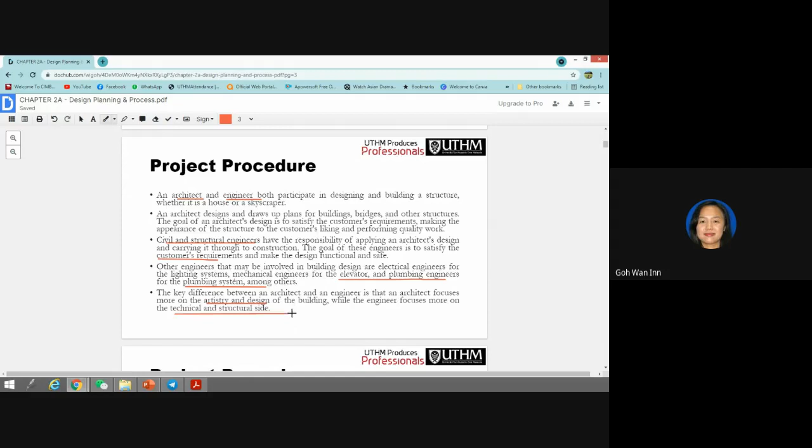So while the architect is concerned to make the building aesthetically pleasing, the engineer makes sure the building is functional and safe. So we are playing different responsibilities lah. And normally, in the site meeting, both parties will fight with each other lah.

Okay. So to develop and present their designs, both architect and engineer use technical drawings called blueprints. A blueprint is the detailed drawing presented by an architect or engineers that outlines their design.

I turn on the aircon mode.

Okay. So in designing any structure, an architect has to plan out his or her ideas by making a scaled drawing. Means the drawing is being scaled lah. I believe you already learned AutoCAD, and some of you are from the X diploma, so you know what the scaled drawing is lah. So before an engineer can approve an architect's designs, they have to analyze the design and select materials that can safely hold up the structure.

Okay, so for this subject, we are going to design the beam, RC beam, up to beam. So for column and others, you need to learn it in the next subject, which is the structural design, the reinforced concrete design. And we are going to learn also timber and steel design for the beam and column. So this is the scope for this subject, up to this point only.

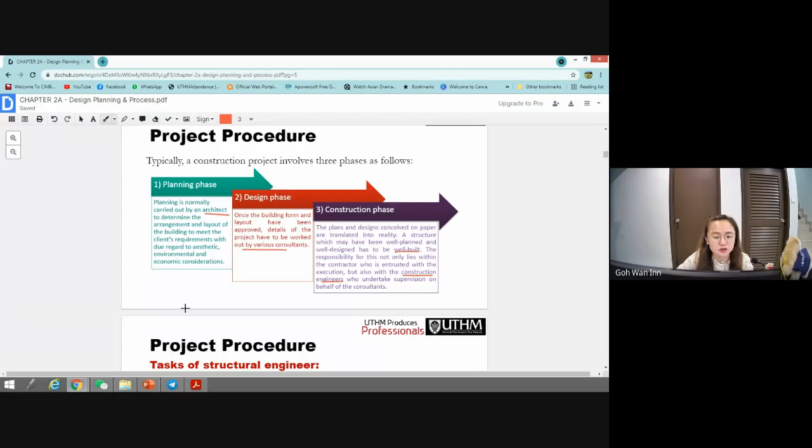So a structure which may be well planned and well designed has to be well built, and the responsibility for this not only lies with the contractor, who is entrusted with the execution, but also with the construction engineers who undertake the supervision. So who wants to be a construction engineer? You need to undertake the supervision on behalf of the consultant. Okay, so on a construction site, normally the consultant will also send their engineers to observe and inspect the quality of the work, to make sure the building is constructed according to the standard, with safety, everything lah.

So, tasks of a structural engineer. For a structural engineer, we have 5 tasks here. So first, select the most appropriate structural system and idealize the building into frames and elements. Okay, so you need to select the properties, select the materials, select the structural system, okay, and idealize it.

And then second, we need to estimate the loading. So of course, we need to calculate the loading for the design building before we start designing the beam and so on. So by next week, chapter 3, we are going to enter this estimation of loadings. And then analysis is to determine the maximum.

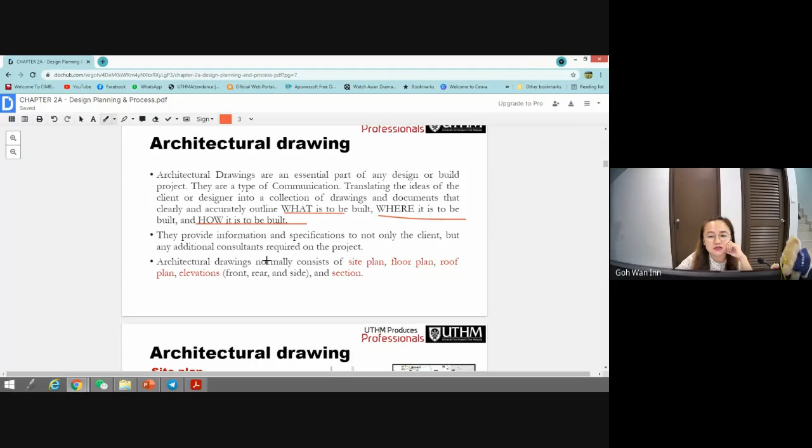So normally the architecture drawings consist of site plan, floor plan, roof plan, elevations and sections. Section is the plan that we cut through, like X or Y directions. Elevation is the front, rear, and side, and section is the cross section. So we will go through the examples one by one. First, what is the site plan? If you have already been through diploma, then you know what this is, especially if you did LI in the internship.

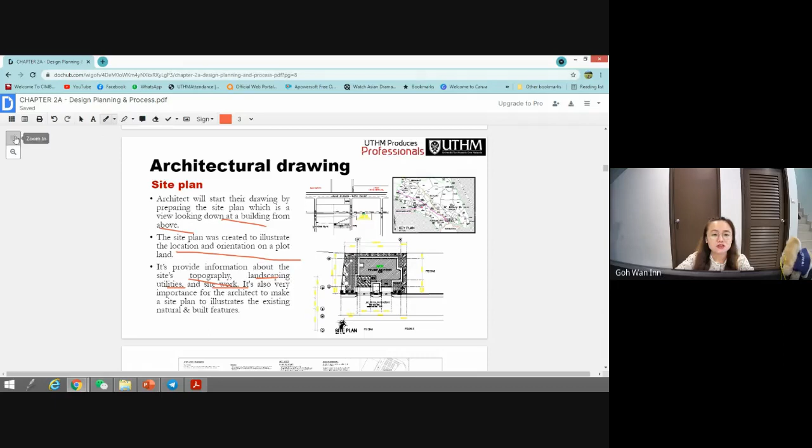utilities, site work, and it is also very important for the architect to make a site plan to illustrate the existing natural and built features. So site plan is clearly for us to see. Okay. So you can see this is a site plan. First, you can see the key plans. So this is an example key plan. So you can see where the proposed site is.

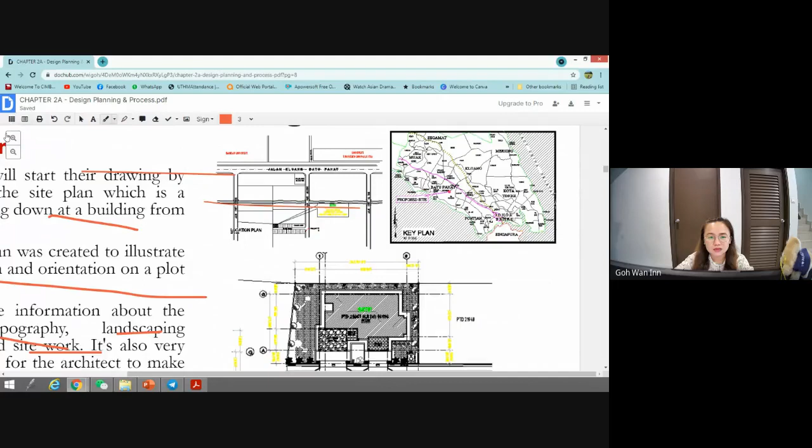So it will tell you this is a building that is here in Batu Pahat. Okay. So location plan. So this is at Jalan Kluang Batu Pahat. Let me zoom more. Okay, so it will illustrate where it is located. So, it's too big. So the location plan will show you it is here. Okay, after that it will zoom in more. So this is the view from the top of the building. So this is the site. So it will show you the nature, the topography.

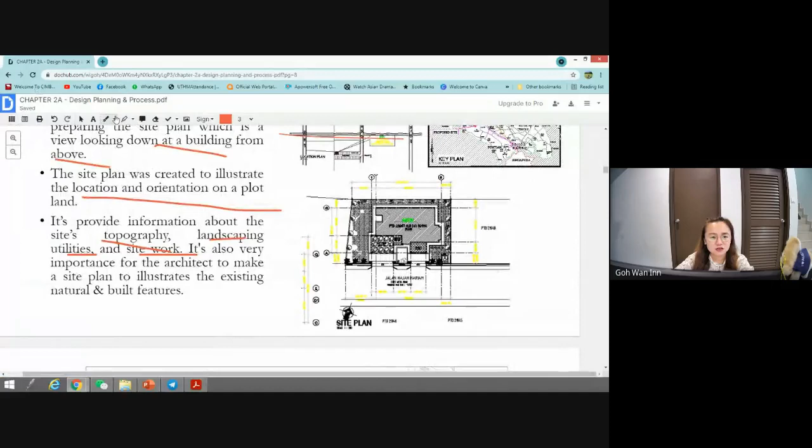So this is the site plans. Let me zoom it out back. I'm not using PDF to view it now because PDF cannot have this function for drawing and many things. So basically this is a drawing for a site plan. So you already learned AutoCAD before, I believe you know this. So again, you can see the location plan, the key plan, the locality plan. Let me zoom in more. You have the PDF slide also, you can zoom in more if you want to study it more.

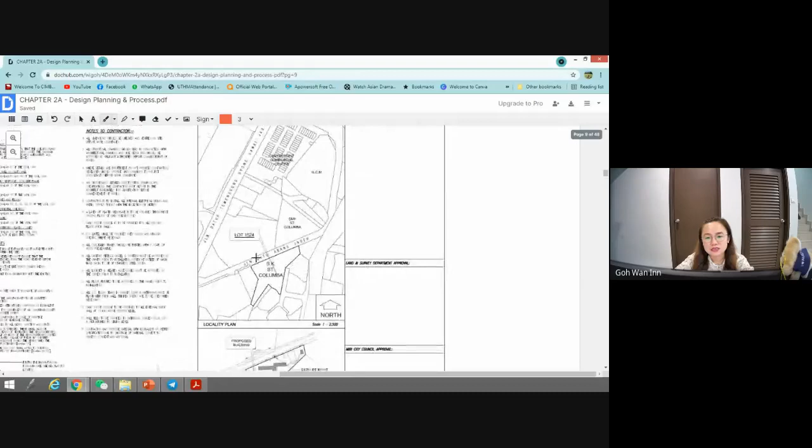So from the site plan, you can see legends, the bomba, and then it will give you the explanation. What is this building for? The base, where is the client, and so on. The key plans, where is the proposed building from the top view. The locality view, where is it? And then it will give you the view of its surrounding and where is the proposed building.

So this is the proposed building from the top, and then the existing building, the existing classroom block, the toilet, all the existing ones are mentioned. So this is the new proposed building. Okay, so this is the example site plan lah. And then next we go to the next slide. No questions, right? It's easy, right? Just introducing to you what is the plan. Not yet, when you face the architecture plan, then you will have questions.

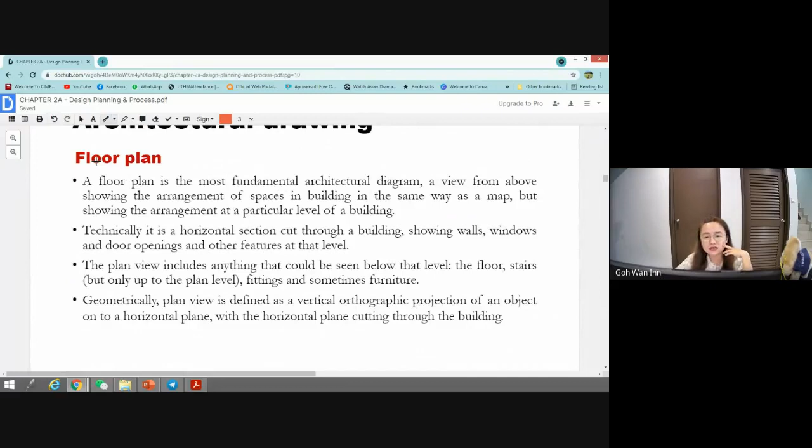So a floor plan is the most fundamental architecture diagram, a view from above showing the arrangement of spaces in the building, the same way as a map, but showing the arrangement at a particular level of a building. So floor plan is according to the floor. So let's say you have a single story building, then you will have ground floor and roof floor. But if you have a double story building, then you will have ground floor plan, first floor plan, and roof floor plan.

So technically it's a horizontal section cut through a building. So the building is cut through horizontally according to floor. You cut in between roof and the ground, so it becomes ground floor. Let's say single building, and then you cut at roof, then it becomes a roof floor. So it is actually a horizontal section showing the walls, windows, doors open, and other features. Architecture plans show you where the doors, the windows, the walls are. But structural plans, no. So we need to convert all this into a structural plan.

So the plan view includes anything that could be seen below that level, the floor, the stairs, but only up to the plan level for the stairs, fittings, and sometimes furniture. So let's say you get the brochure from people selling houses, especially like the single story house, the double story house.

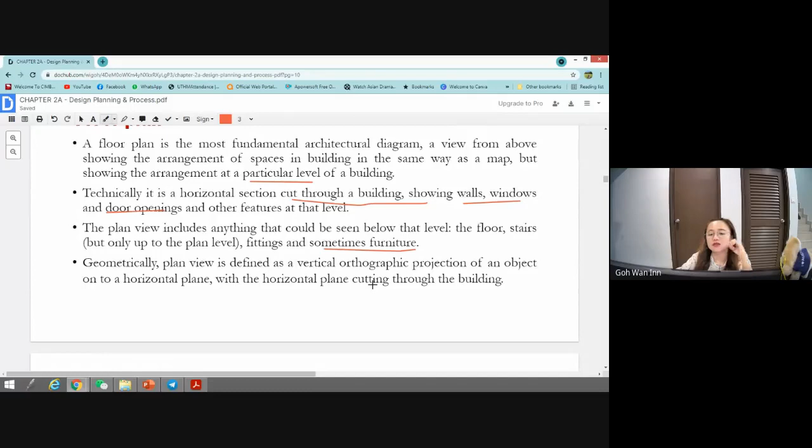So this is an example of a 3-story kindergarten building, I think. You can see this example building, let me zoom in more.

So this is not a structural drawing yet, okay, it will mention and explain to you. You see this is the door opening.

So this is what area? Dining area. So this is the meeting room area, the corridor, the staircase, the stair, the office, the nursery - 1, 2, 3, 4.

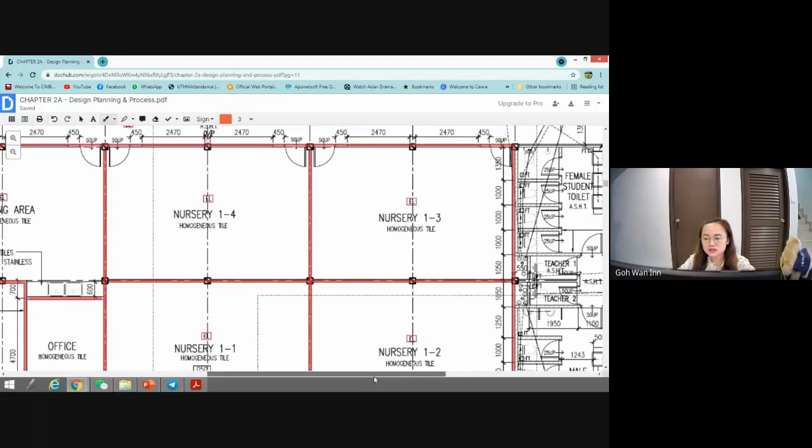And then they have toilets. Toilets also they will have a drop, they will explain how much the drop is. The drawing is very detailed and I cannot see clearly, but you can see these buildings, the toilets here.

Normally toilets will have a drop. So where is the up, where is the drop, they will show you. Drop means it is lower than the normal slab. Because when you go to the toilet, normally it will become lower, you will drop the slab - that's what we mean by drop. So when you design, you also need to drop the slab, else the water will go to other places. If you don't believe me, go to the toilet later, not now.

So this is the corridor and so on, but you can see all the doors. They will include all the details, mentioning utility rooms, where is this, where is that, for all the information. And then they will show you this.

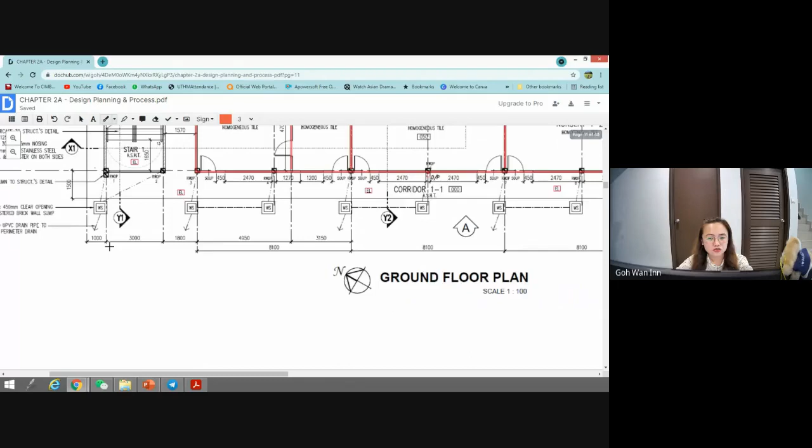They will show you Y1 and Y2 - this is where they will prepare the section, the cut, for you to see later. They will have X1, Y1, and the direction, you see this arrow direction. That means the view provided by X1 is cut from here to there, going to here. From Y1 means from here to here - yeah, my mouse is not nice at drawing this, I need to use the tablet but I'm lazy to take it out. So it's from here to here, Y2 also same.

So you need to see the drawings, not only one, but refer to each drawing. So when you have the plan, you will also have the elevation plan - A, B, B is from here, C and D. So we will go to more.

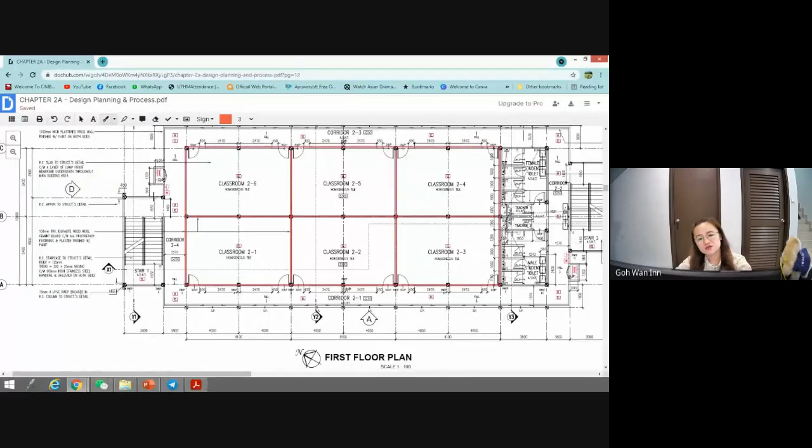So this is the first floor plan, that one was the ground floor, so now it's the first floor. You can compare what things they have or don't have. So the ground floor, they will not have the corridor like just now, right?

The corridor, they don't have any wall, but here you see they have the wall design and so on - this is a wall that they have to build. They have the corridor built, it becomes like a cantilever structure. So you can see here don't have any column - no column, right? Corridor, you can see here is nothing, nothing here.

But then you can see where it comes here, you can see here you have the columns, so you have the point. No columns here, you have the wall. So this is the first floor.

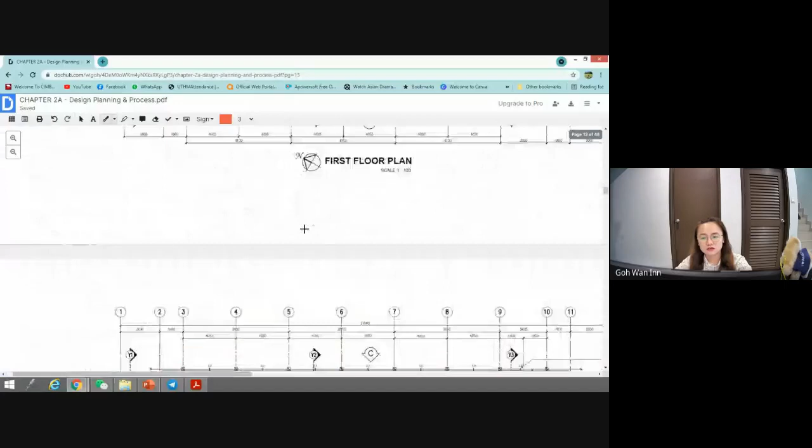Also the second floor is similar, but it will show you the purpose for this room - showing the purpose of the room is also important, so you can calculate the loading. Different areas might have different loadings - like for the corridor, you don't need to use the primary beam, you can use secondary beam instead, because the loading is small, it's just human traffic. The staircase, the toilets, where is the location for all this.

This is the architecture drawing, so the roof floor. The roof floor will show you where is the floor - meaning the RC flat roof with Sika waterproofing details. This is the roof, they will show you what requirements they want.

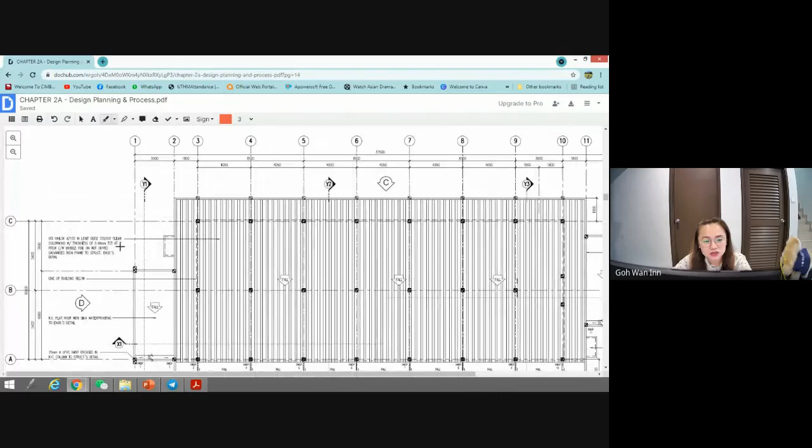Okay, it will show you the detail of this. RC flat roof, the waterproofing, spoon drain and so on. So this is the roof. They will give you the details, the frame, the iron frame, and so on, and the directions. So that one is architecture plans.

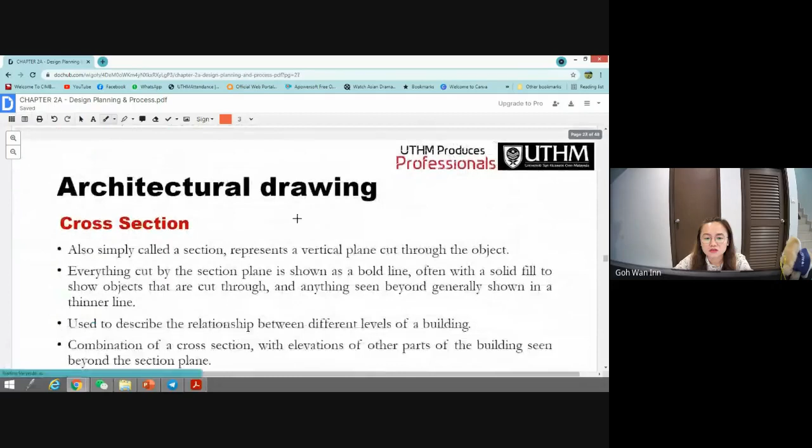So this becomes the ground floor plan. Wait, let me show you the elevation that they have. No, this is another building. Okay, this I think is the same building.

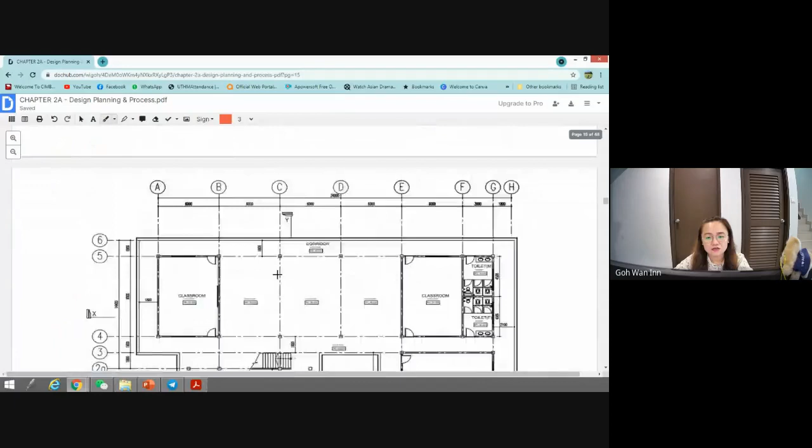Alright, I go to the ground floor drawing first. Wait, let me go to that. Okay, so if you have this PDF, if you already printed it out, you can see the plans. But this is another building. This is actually from a book sold last time by Mr. Sophie, Practical Design Reinforced Concrete Building, if you can see my webcam.

So this is another building. Just now was the nursery building, but this is a 2-story school building design. So it's a book from UTM by Muhammad Saleh Yassin, a very famous lecturer from UTM. So this is another set of buildings, another drawings, another set of architecture drawing.

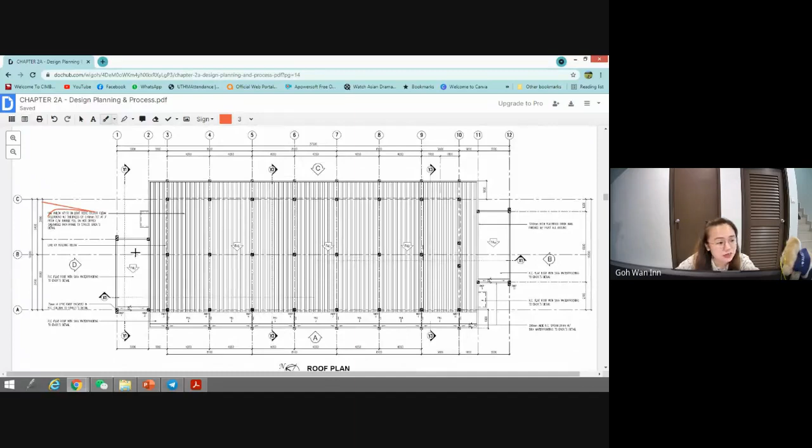Just now the first example was for a nursery, the kindergarten. So now we have another set of architecture drawing, not the same, different drawings, different set. So you can see now another drawing of a school building. I'll zoom in and out more to let you see the overall picture. Okay, so this is a ground floor plan for that drawing.

So you will have a simple building like this on the ground floor - classroom 1, 2, 3, 4, all these are classrooms, and the toilet. This is the toilet area. Imagine when you are in the school, the toilet is always at the end of the building. And then this is the library. So all these are corridors for walking, and this is the staircase to go to the second floor.

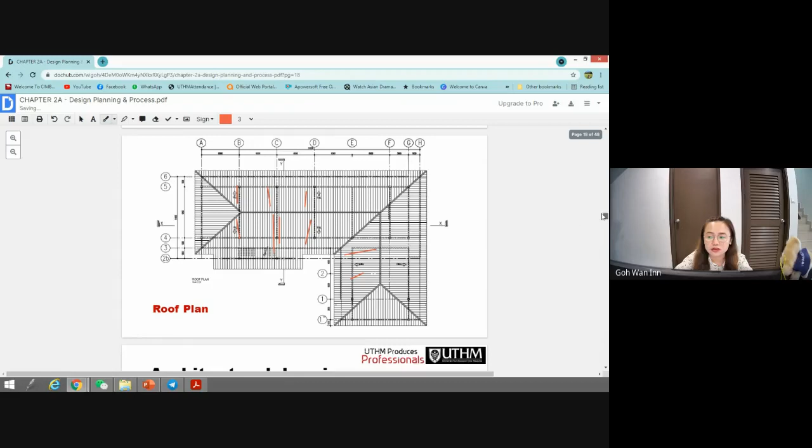So they will show you also where the column direction is basically, for the main columns like the architecture design. But if you need any additional columns, you can add them also. The beams here are not necessarily just what's put in - basically the beam will normally follow the locations, following the shape of the building, but you need to add the beam that is needed, and then it's like a flange beam in a slab, the flange beam.

Okay, join with the slab, become the T flange beam or the L at the corner. So after you get all this plan, that one is finished, that plan, the floor plan. So we go to elevations.

That just now is 2 examples of the ground floor plans. Don't be dizzy with it. So elevation is a view of building seen from one side, from the side view. Just now is the floor view. Okay, from top you cut section horizontally.

So this is elevation from the side. It's a view from a building seen from one side, a flat representation of one facade. The most common views used to describe the external appearance - how does it really want to look like after the completion?

So each elevation is labeled in relation to the compass direction it faced. Just now I mentioned the view from A, B, C, D according to that drawing, right? So you have compass directions. From left, the view is from here. From right, from left view to the right and right to the left. So you need to put the compass directions.

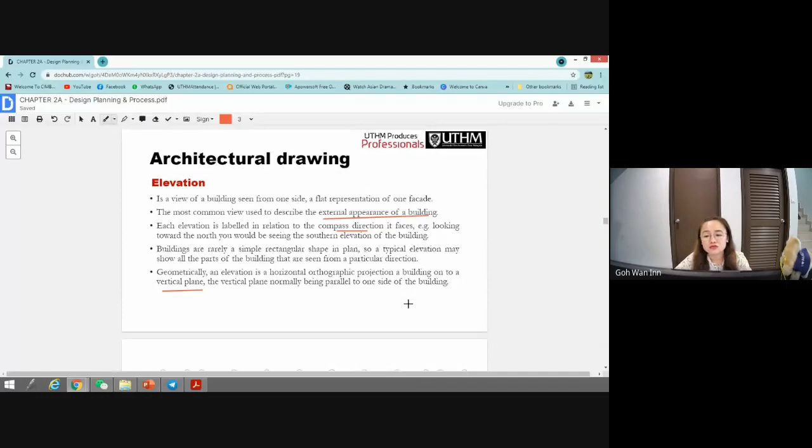Looking towards the north you would be seeing the southern elevation of the building. So buildings are rarely a simple rectangular shape in plan. A typical elevation may show all the parts of the building that are seen from a particular direction. Geometrically, an elevation is a horizontal orthographic projection of a building on a vertical plane, the vertical plane normally being parallel to one side of the building.

So examples - this is the elevation for the school building from the front. From the front here you can see ground floor, first floor, second floor, and the top, the roof floor. So actually this is the plan for this building. You can see this is the first view, the building here.

So the view, it should be here, but then it is not 3D. So the building is basically L shape. You can see it is L shape, right? The L gun. But then if you view from here, if you view from here, if I slot in this one, if you view from here,

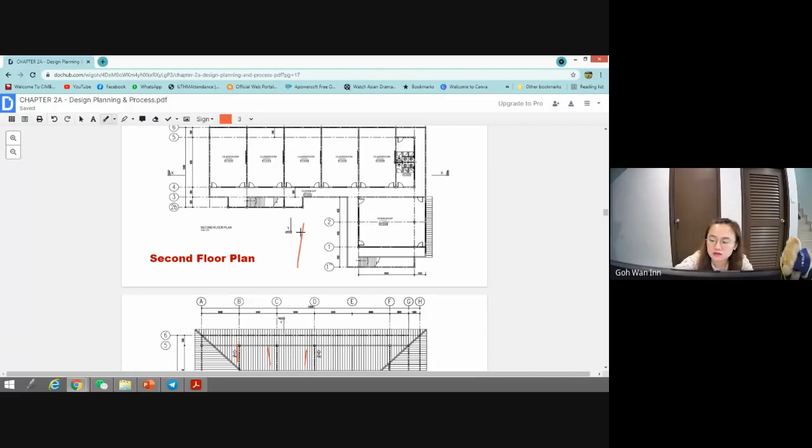Oh, the internet is, wait up.

If you view from here, from here, this and this is going to, it will not show this part. This part is not being shown. It will show the view from here to here, from here to here, this part. That's why when you see the building, you can see this part, the school building, and then until here. Here is actually that part.

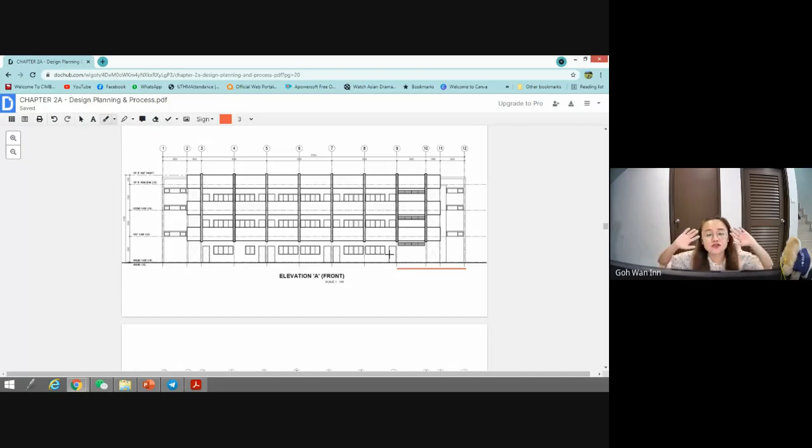Okay, but it's being overlapped because it's not 3D. It's view from the front view, and then you have the back view. Now, from the rear view, you will see from the rear, which is this side. Let me go back to this. If mentioned the rear view means it's from this side. So you will see, you will not seeing this part, but you will see all this part.

You will see all from here to here. So this is the rear view. And this is the front view. Go back, if you are not familiar with the architecture drawing, after this class, you can go through the slide again, you imagine and you compare, because you yourself, you have to do the project, okay? So this is the rear view. From rear view, what does it look like?

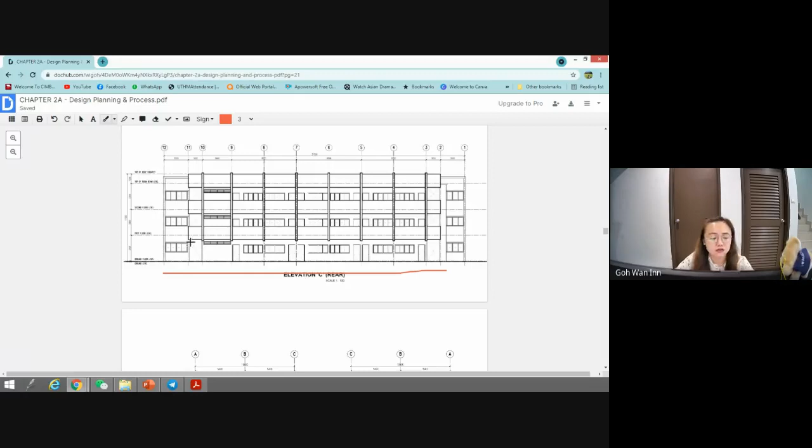You can see that this is the corridor, and then the school building. I believe everyone got in the school before, so you are very easy to imagine the school building. Ground floor and then upper floor, first floor, second floor, and roof floor. You can see each building, how does it look like when it is complete. You need to have the imagination of how it looks like, because if you work in the contractor, become the engineers, site engineers, then you need to construct to make the building look like this after it's complete.

And then view from the right side and from the rear side. This is from the right side, which is from this side. And this is from the left side. How does it look like? So you can go through it again.

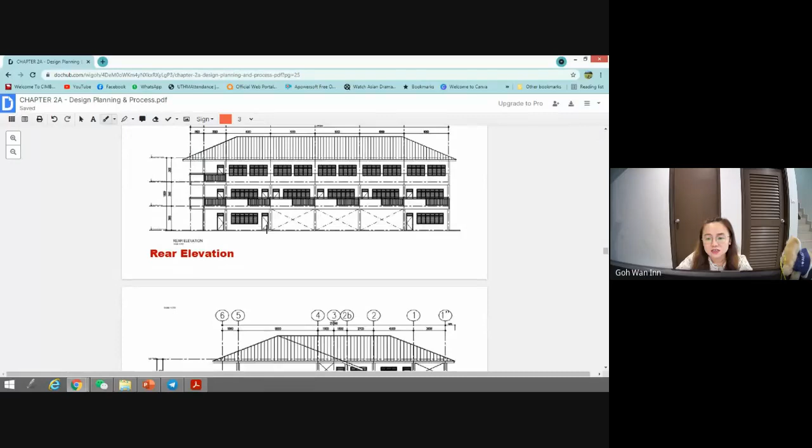And then the front elevation is not my parcel, some other my neighbor's parcel. The front elevations - this is the left elevations, and then this is the rear elevations. I think this is for another building. This is the right elevations. You can go through it.

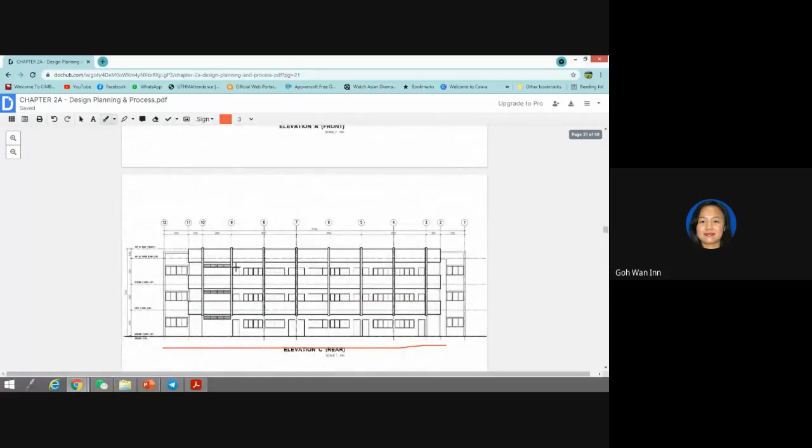So if you have this book, it will show you the elevations. Oh, this is for the... sorry, just now this one is for the kindergarten building, the 3-story. And this is for the school building. Okay, for the school building.

My cam is error again.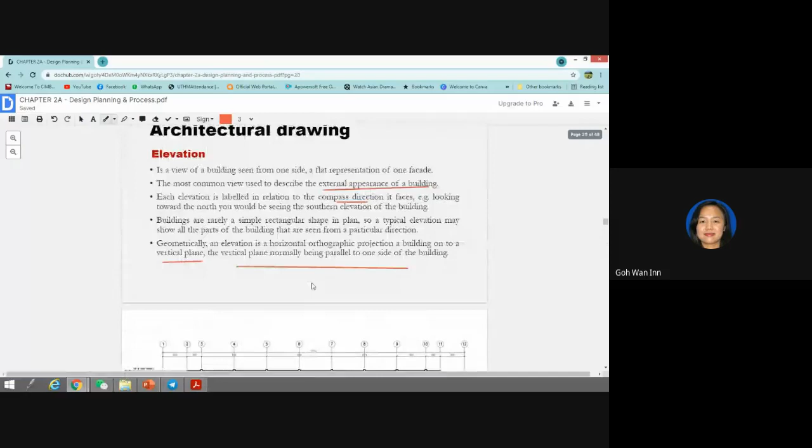Switch it off. Okay, so this is for the school building. The front view, left elevation, rear elevation, and right elevation. Okay, so just now this one, the A, B, C, D view supposedly is for, I need to scroll to the top. These two buildings look similar. Wait, this is the A, B, C, D view.

Okay, my internet is not working okay today. It's delayed again. Wait, my computer is protesting now. It's hanging. Hiya, wait, why is it hanging? Never mind. I opened it. Wait, my computer is hanging. The screen is not moving. Let me open this one, but this one I cannot touch it.

Okay, so just now you have 2 sets of it. You can go through it. Okay, the right view. Okay, the cross sections. Just now we already explained the elevation plan, so now we go to the cross section plan.

Cross section plane, also simply called a section, represents a vertical plane cut through the object, and everything cut by the section plane is shown in a bold line, which are solid fills to show objects that are cut through, and anything seen beyond generally shows in a thinner line. It is used to describe the relationship between different levels of the building. A combination of cross sections with elevations of other parts of the building seen beyond the section planes. So geometrically, the section plane is a horizontal orthographic.

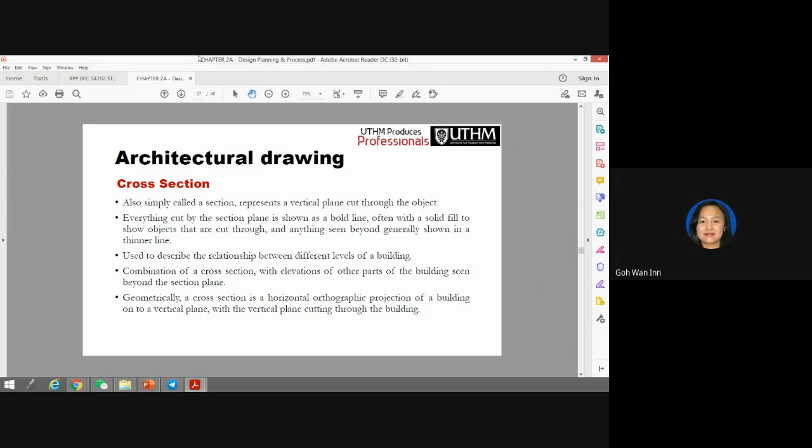Okay, so you can see that they cut through the nursery at the kindergarten. They cut it, and then you can see that this is the cross section. Just now we have the front view, the side, the elevation view from outside, exterior only. So this one will cut through the middle, so you can see that from X1. So when you cut, according to the view, what you will look at. So you can see that this is the ground floor, first floor, and ground floor, first floor, second floor.

So you will have the area of prayer rooms, computer room, library, classroom. Okay, and then this is the corridor. Toilets are here, I think. Okay. So XX, and then the YY, when you cut from that view, it will show you the staircase. So this is the design of the staircase. So you climb, and then this is the stair, and then you're going up again. So you can see all the details. You have the PDF, you can go through it again.

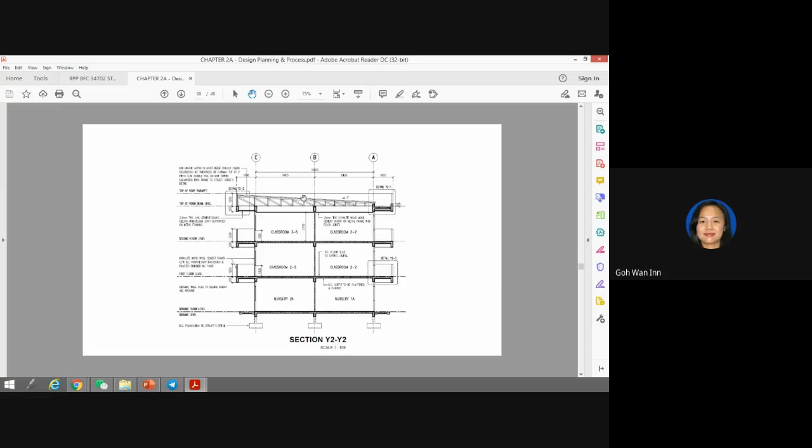Okay, so we'll cut from Y2 and Y2. So you will see the views like this. Okay, the corridor, how does it look like? Okay, the frame for the roof. Roof truss, how does it look like when you want to calculate the loading? Okay, so this is Y3. The toilet, how does it look like? You need to build exactly like what the design wants.

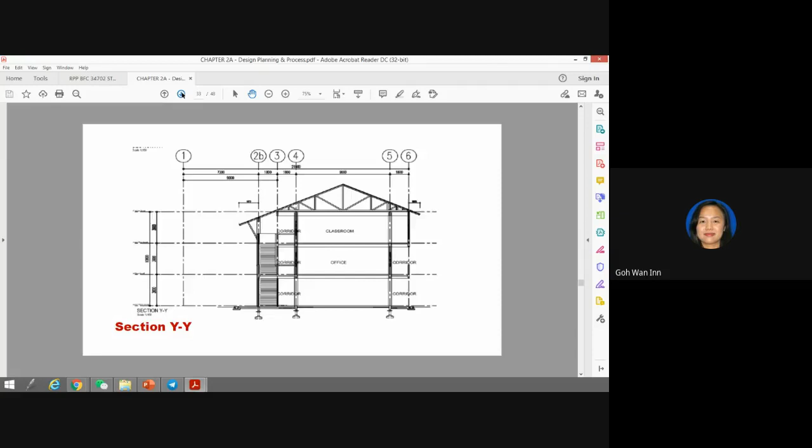So basically you have site plans, floor plans, elevation plans, and cut section plans. You have 4 types of plans for the architecture plans. And then an engineering drawing is a plan or set of plans for how a building or other structure will be built, generally prepared by structural engineers after getting the architecture plans for the building. So this involves determination of the following.

So what you have to do, we have to determine the position and orientation of columns, positioning of beams, spanning of slab. You want it to become one-way slab, two-way slab. How small, how big you want it to be. If it's too big, too wide, it will have failure, the failure at deflections. Okay, and then the layout of stairs, and then selecting the proper type of footing that's suitable.

Primarily concerned with the load carrying members of a structure and consists of structural elements, size and type of materials to be used, as well as the general demands of connections. It communicates the design of the structure to the authority for review and approval. So you need to draw out the plans and then get the authority to review and give approval.

It is also part of the contract documents which guide the contractor in detailing, fabricating, and installing the parts of the structure. So you need to provide the details, the detailing, so they can do the fabrication and installation. Following it,

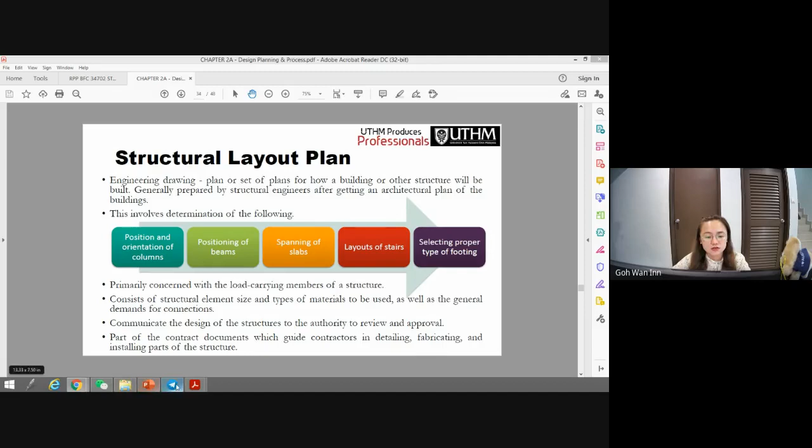I want to see that it is already not hanging. Let me check. It's still hanging.

Okay, so positioning and orientation of columns. When you design the column, the first step, before you go for the calculations, there are some building principles which help in deciding the column positions. Columns should preferably be located at or near the corners, okay, later we'll have the drawings. So normally it's at the corners of a building and at the intersection of beams and walls. Let's say you have an intersection like a T or a cross. At that location we normally put the column, because the load will be distributed to the corners of a building and to the intersections of beams and walls. So there you should put columns.

Select the positions of columns so as to reduce bending moment in beams. You need to select the position; it cannot be too far, else the bending moment will be big. Avoid larger spans of beams. The span shouldn't be too wide. If too big, you will have bending issues and deflections. Avoid larger center to center distance between columns. Both are the same: if you have a larger span, it means your columns are far from each other. So we need to avoid that.

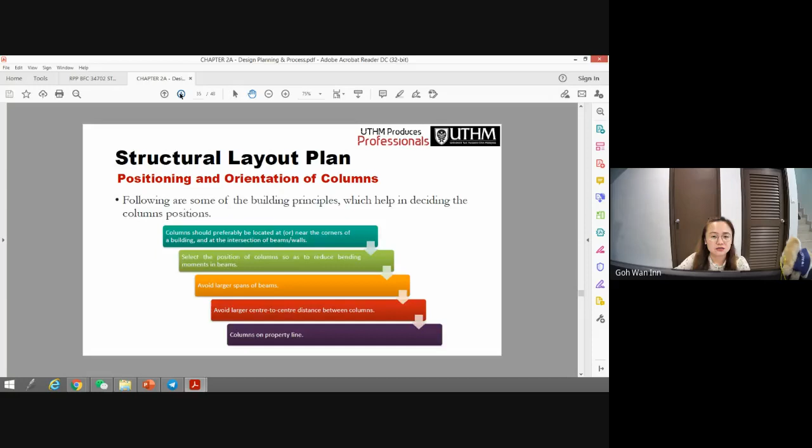Columns need to be on the property line. Don't go out from the property; it must be in line with the property, flush it in. Normally, once you become a consultant engineer, you will not do this manually. They have software, like the one you are going to learn in UTHM, for example. There are many out there, but the basics are normally the same. Position and orientation of columns.

The position of a column outside the wall in a room should be avoided, as it not only gives a bad appearance but also obstructs the use of the floor, creating problems in placing furniture flush with the wall. So columns are normally flush with the wall, meaning you cannot put the column there by itself. It will become an obstacle and obstruct the use of the floor space. For example, at a shopping mall, a big column in the middle will obstruct the walkway and not give a good appearance.

So normally it's flush. Even at your home, you will not have a column in the middle, right? It is all flush with the wall, built in together with the wall, so it's not too obvious. The width of the column is required to be kept not less than 200 millimeters to prevent the column being slender. Slender means the column is too thin and too long, the ratio. So the width is normally not less than 200 mm at least.

The spacing of the columns should be considerably reduced so that the load on the column for each floor is less and the necessity of a larger column section does not arise. If the spacing is bigger, you need a bigger column. If you reduce the spacing, you can reduce the size of the column.

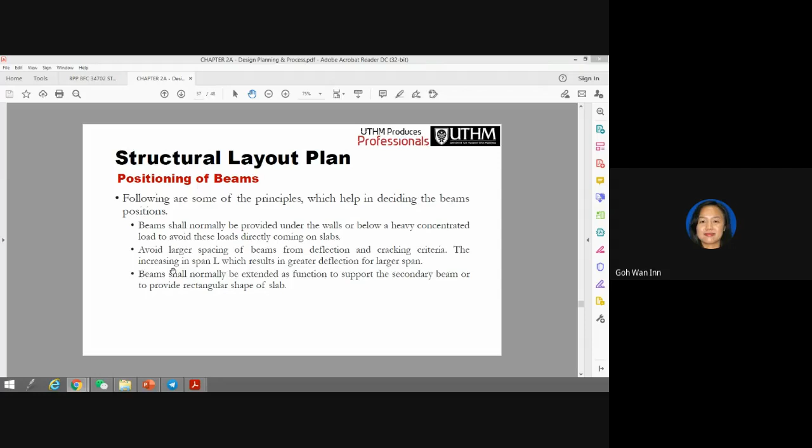Next slide. So, spanning of slab. This is deciding the supporting arrangement. In the calculation next chapter we will learn the one-way slab and two-way slab. So when the supports are only opposite each other, or only in one direction, the slab is considered as one-way supported. It means it only distributes in one way, to the left or to the right. It is not going to the four directions or to the top and bottom, not to the four edges. Okay, later we'll see the example.

In practice, when the rectangular slab is supported along four edges, meaning front, rear, left, and right, and it is a one-way slab, it means that Ly over Lx is greater than 2. Ly is the y direction and Lx the x direction length. Even though it's supported by 4 edges, it's still considered a one-way slab. The load will not distribute to 4 edges, but only 2 edges. So in a one-way slab, main steel is provided along the short span only, and the load is transferred to two opposite supports only.

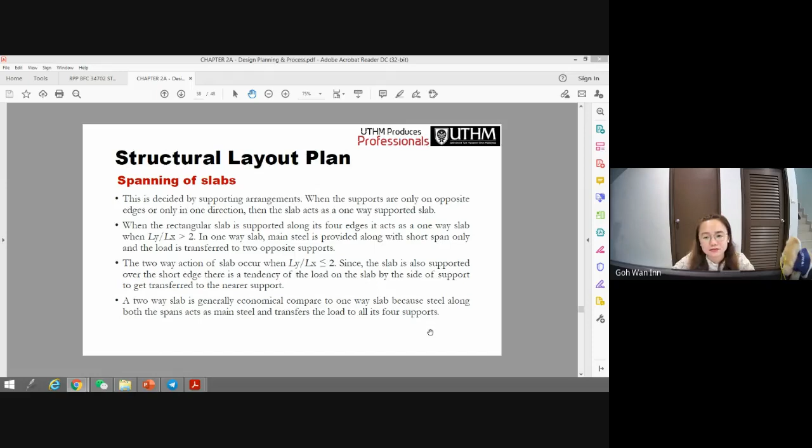Go to the next: layout of stairs. It is constructed to provide ready, easy, comfortable, and safe ascent and descent. It consists of flights of steps, usually with one or more intermediate landings, provided between the floors. So just now we saw the intermediate landing, provided in between the steps. Between the floor levels, you cannot directly climb up; it is not a comfortable design. If you keep continuously climbing up, that one is hiking, I think. Okay.

The dimension of stairs should be such as to give the maximum comfort to the users, which depends on the use of the buildings. Okay, the basic guideline of staircase layouts was clearly stated in the Uniform Building By-Laws. You can go through it, but this is not in this subject.

Normally, an architect will provide all information required in designing the staircase. Normally, the architect already decides the staircase design, so you design accordingly. It's structurally designed to consist of upper and lower supports.

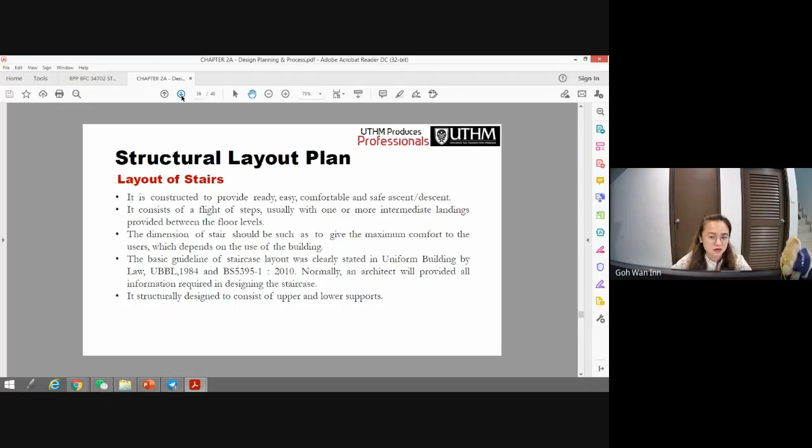So at the staircase location, do you have a slab? Is it considered as a slab? When you calculate the loading distribution, we make it as void. When we calculate the load for the span and for the slab, we will not consider it a slab. So that one will be next chapter.

Okay, footing type. The type of footing depends upon the load carried by the column and the bearing capacity of the supporting soil. For peat soil, then we need to have piles. So if the supporting soil is strong enough, then we just need a shallow foundation; we don't need a deep foundation. The soil underneath the foundation is susceptible to large variations. Even under one small building the soil may vary from soft clay to hard sand.

It is necessary to conduct the survey in the area for soil properties. You need to do the site investigation. Take the bore pile, then test and do the investigation. That one you will learn in geotechnics.

For frame structures, isolated column footings are normally preferred, except in case of hard strata at great depth, where pile foundation can be an appropriate choice. If columns are very closely spaced and the bearing capacity of the soil is low, raft foundation can be an alternative solution. For a column at the boundary line, a combined footing or a raft footing may be provided. This one you learn in foundation and geotechnics.

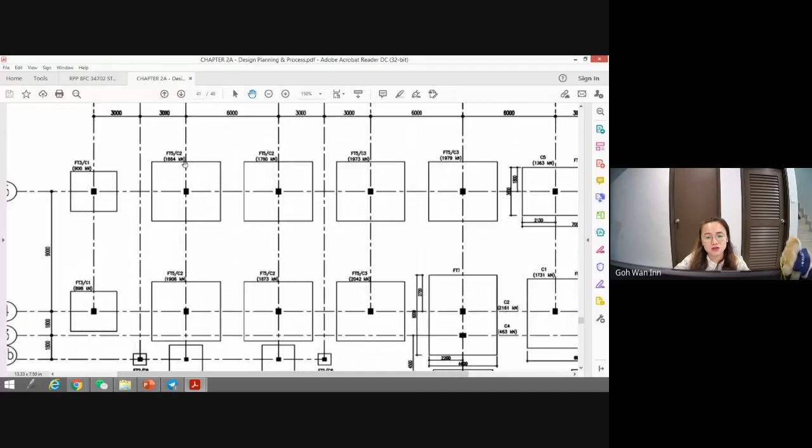Okay, so this is an example of the footing plans. This is the building, for a school building, I think. So this is the footing plan. It will show you the size of the footing, together with the loading it needs to support. You can see this one is to support 900 kilonewton. The columns will have the detailing, but here it's showing you the load for the 1884, the 1864, 17 something. This is all the loading they need to have.

And then you can see that when the columns are too near, they will combine these two columns with one footing. And these three columns combine to become one footing. So this is a group of columns combined with one footing. It is not necessary to have one column, one footing. If their locations are too near, you can combine them, so the load will distribute to the same footing.

Okay, so this is the ground floor plan. Just now you saw the fancy architectural plans that we refer to. Now you can see the ground floor plan that structural engineers are going to do. Here, one lacking thing is it didn't show the slab, whether it is one way or two way. You can see this is the floor, this is the slab, this is the column, this is the beam, toilet areas, and this is the ground floor plan.

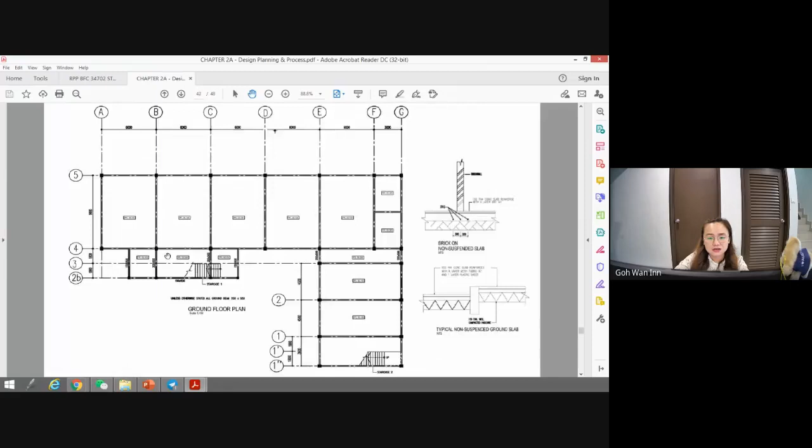But do you notice that this line is a straight, solid line? Solid line means it is not a flanged beam. These are all rectangular beams. It means the floor is designed as a non-suspended floor. Non-suspended floor is what? A non-suspended floor is where the load from the floor will directly distribute to the soil underneath. It will not distribute to the beam. So it is not a flanged beam.

So if you design the ground floor as a non-suspended floor, the beam is rectangular. If you design the floor as a suspended floor, it is a flanged beam. The beam and the slab are connected, joined together, so that's why it becomes a flanged beam. And then this is the column. Black in color means on top it still has the column. It has the ground floor column and it is also built up to connect to the next floor. So here you have columns.

My internet is still not okay. I want to use that pen tablet. Oh, it's still not showing me. Wait, because I want to draw something, it's much easier. Let me.

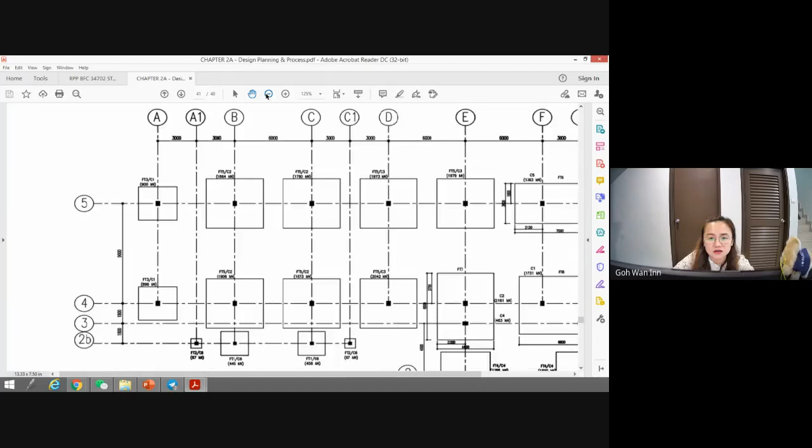Okay, so you can see that at the toilet area, they also have a drop. When you have a drop, or you are not a suspended floor, it is a solid line. So you can see the difference on the first floor, when it is a dash line. So all these columns are going to the next floor, that's why they are in the hatch color. The white color with a cross sign means that on top of that floor there is no more column.

So in this example you can see this is the school building. Now can you see this floor? Just now that one didn't have this sign. This is the sign of how the load of the slab is being distributed. S1, can everyone see the S1, S2, S2? Can you see this? Yes, doctor. This is the direction.

So when you want to do the test one, quiz, tutorial, you need to plot this drawing from the architecture drawing, but it is not this complicated. Not this long, it is not as detailed as this. So you can see the dash line here means that this beam and the floor slab are connected. It's a suspended slab.

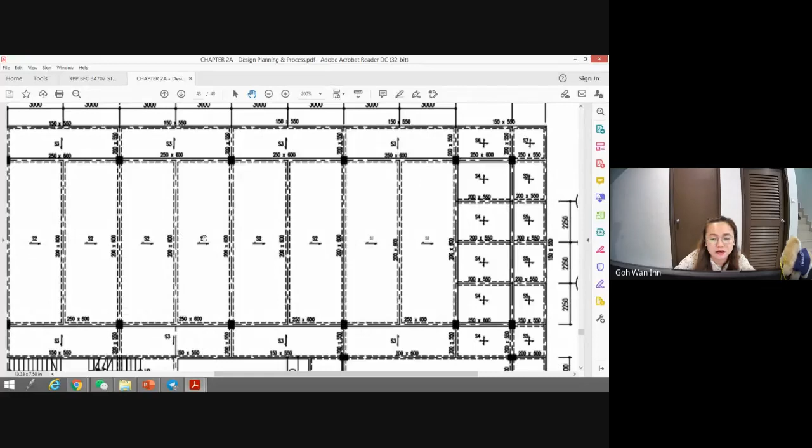And then you can see that the toilet is suspended, but then you have a drop. So from the drop point it uses the solid line. And here there is also another drop, so there is a solid line. But all these beams and slabs have no drop, that's why they use the dash line. So here is a solid line, meaning the corridor has a drop. So this is the line for the beam when you draw the structural drawings, and this is the mark for where the load is distributed.

As I said, if you see the architecture drawing just now, here there is no beam, right? But in the structural drawing, if you feel the span is too big, you can add a beam. That's why sometimes when you see buildings, even a house, when it is not covered by the plaster ceiling or cornice, you can see a beam across. That's why they put a beam here, across.

If you look at the ceiling from the rooftop and the ground floor, they have a slab and sometimes they have a beam, right? Some buildings have the slab and the beam. Can you imagine? Can you see the beam in the middle sometimes? I want you to take a photo and show me next time in the Telegram group. Can you imagine that? The T-beam?

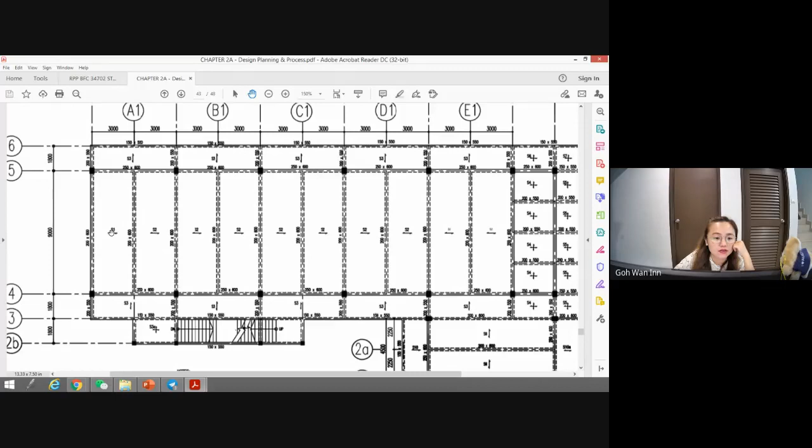Anyone? Okay, so this is the beam they add in between the slab, but there are no columns here. That means the load here will distribute to the left and to the right, and here to the left and to the right. So this is what we call the secondary beam. This secondary beam is going to distribute the load to this main beam.

The secondary beam will distribute load here as a point load. Here you will have a point load on this beam. Consider this once you calculate the load from the secondary beam. The secondary beam load will distribute to here and to here, so you will take half. Then from here it will distribute to this column and that column.

So this is a secondary beam, this is a secondary beam, and this is a secondary beam, where there is no column supporting here. These are all secondary beams because there is no column provided. So the load goes through the main beam, and then the main beam distributes the load to the column. So this is the first floor. Wait, I zoom out a bit. This is the second floor, similar, and this is the roof floor.

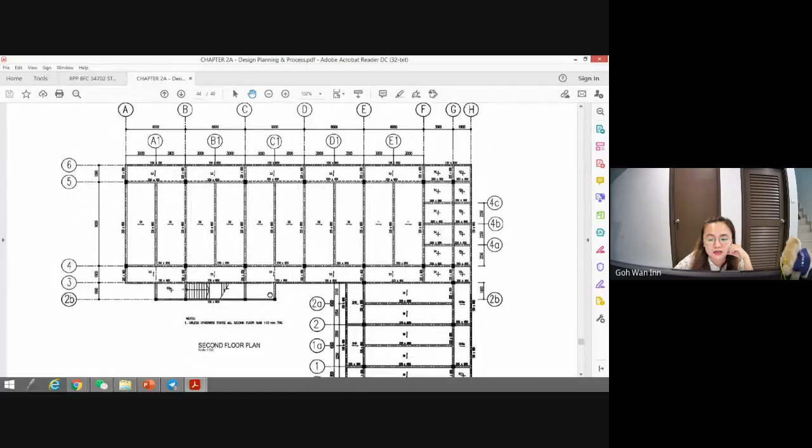Okay, just now this one you saw. So I forgot to explain the staircase area.

It's blur. You can see that when you calculate the floor, here is the straight line. That means when you calculate the slab distribution, the load is not distributed from the staircase to this beam. The staircase is going down, right? So this beam is not taking the load from here. It's considered the void area.

So when you go to the next one, this is the roof plan. When you consider the roof plan, you can see that the column is no longer in the black color. Just now, the floor before, all the columns were in this black color, hatch. And you can see here column D5, when you go to the next one, column D5 is now in this.

Cross. White color, no color, with a cross. So you can see this is a roof plan. Let me zoom in for you to see. So it's a cross, actually there is a cross inside. There's a cross here, X sign.

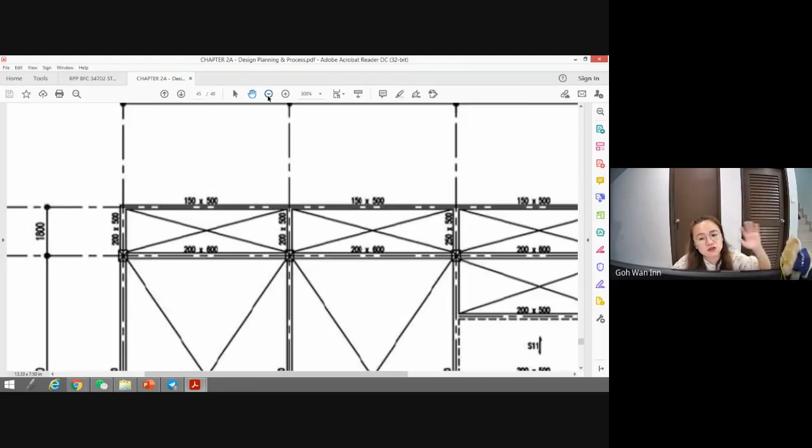This means the column stops at that floor and doesn't continue on top. On top of this floor, there's no slab and no more column. So the column ends here. Can you imagine, on the ground floor there's a column, and then there's a column on top. So the first floor also has a column on top when it is black color. And then until the roof floor, the column only goes up to the roof. There's no more floor on top.

So that's why it is called cross, C-R-O-S-S, when it has no color. In black color it is called hatch. So the black color means hatch, which means on top of it there's still a column. When it has the cross sign, it means the column stops there, or the column stops at this floor.

And then this big cross sign means there is no roof, there is no slab. So at the roof here, you only have 1, 2, 3, 4, 5, 6 slabs. The others have no slab, it's just the roof frame, the roof truss.

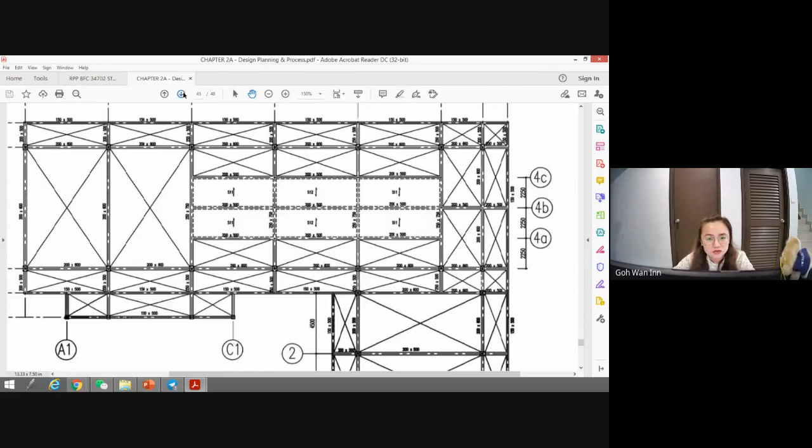So this is basically what you have to prepare. This is the truss layout. You can see that this is a truss layout. Normally the rooftop will have no slab, unless they have a place to put the water tank. So normally I expect this place is for the water tank and so on.

You have to put the slab here, and then all these are just rooftop. This is the solid slab here, but then they have the rooftop here. So for the truss layout, you don't need to prepare for this.

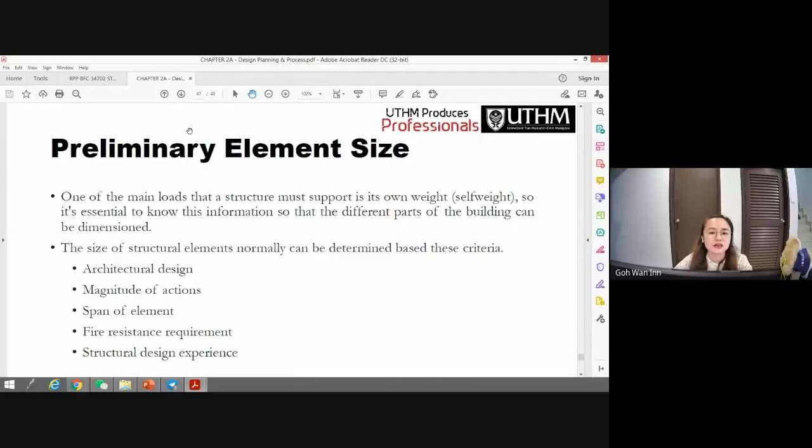So the preliminary element size, I'm not going to touch it today. It's just 2 pages, and there's a preliminary beam size. Actually, I already prepared the video, but I'm going to explain it next week.

So actually now I want you to look at this one. This one is from last semester. Okay, last semester questions. Actually this is last semester's questions from the final exam.

Let me open the questions for you to take a look. Do you want to take a look at the final exam question from last semester? Do you want? It's fine too. If you reject, it would be strange, right? You must take a look, right? Even I would take a look.

Okay, so for this subject, you can see that this is the final examination online. Last semester was online, and this semester is still online. 2.5 hours for you to answer, with an additional 30 minutes for you to upload the answer sheet. So totally 3 hours, but actually 2 hours and 30 minutes you need to finish everything, and the last 30 minutes is for you to upload.

Same as your test later. Your test will be, I think, 1 hour and a half or 1 hour, I can't remember, and then you have an extra 30 minutes to upload. And for this semester, we are all required to use Author for the test and final uploads.

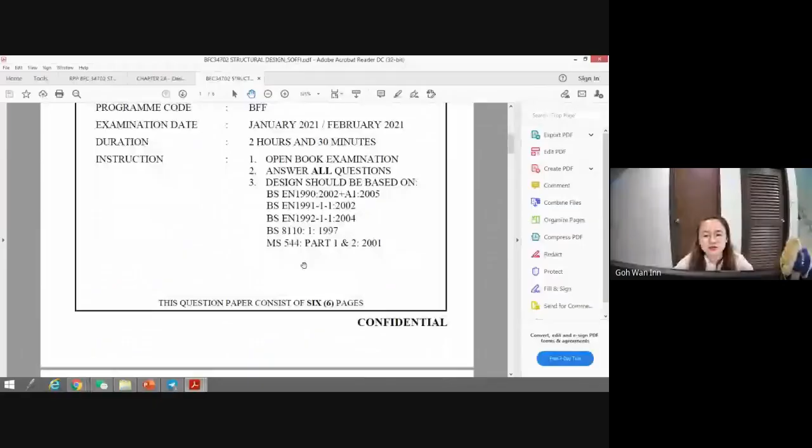It's an open book examination. That's why I asked you to buy the Eurocode, so you can open the book for anything. Design should be based on this; they give you the standard. So normally they will have questions explaining the theories from chapter 1 and 2, and then they will show you a figure and say it shows something, and that is also theory.

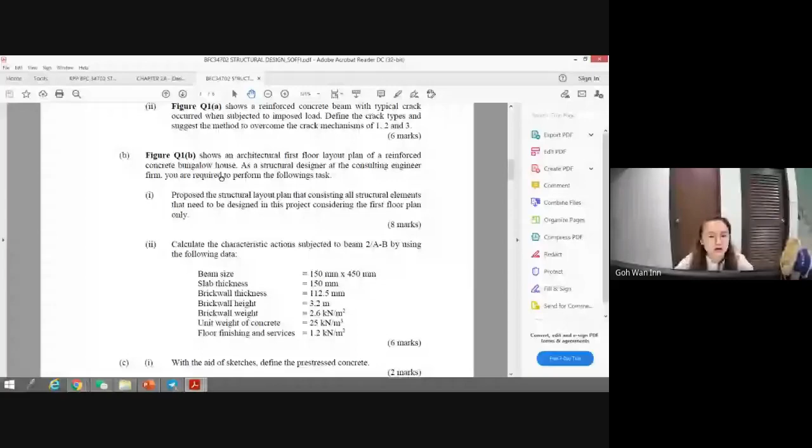Figure Q1B shows an architecture first floor layout plan of a reinforced concrete bungalow house. You need to read this carefully, this is important. As a structural designer at a consulting engineer firm, you are required to perform the following tasks. First, propose a structural layout plan that consists of all elements that need to be designed in this project, considering the first floor plan only.

Once you read this, go to question Q1(b), which is this one. Is it the same as the one I showed you? Yes, I already gave you an example today, this is from the past year final. Once you do this, you get 8 marks. Later I will show you the answer scheme.

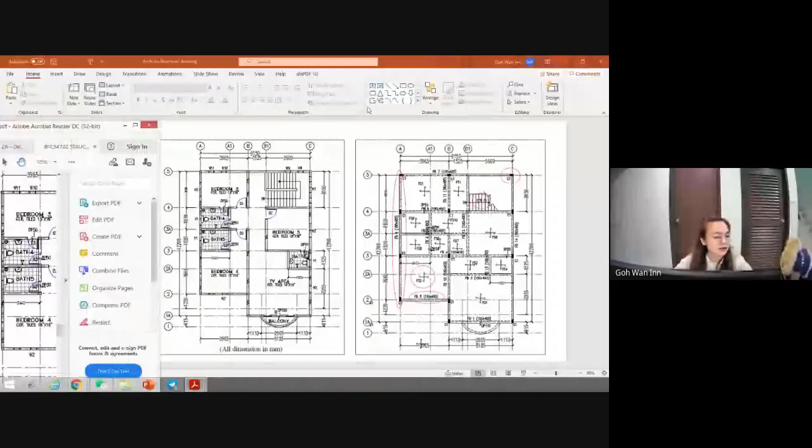So what's next, where do we go? This is the first part, and this only gives you 8 marks out of 100 marks. After that, you need to calculate the characteristic actions subjected to beam 2AB using the following data.

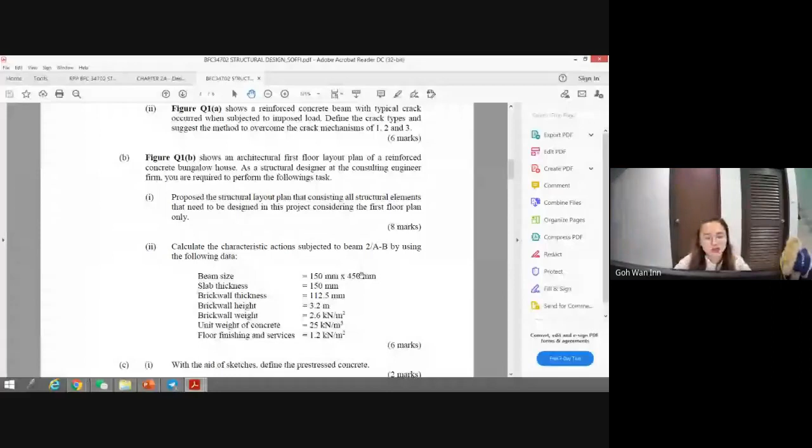You use this beam size, slab thickness, brick wall thickness, height, weight, concrete unit weight, floor finishing and services. You need to calculate the actions acting on beam 2AB. Beam 2AB means beam 2A to B. This beam they want you to calculate.

So how do you propose the beam? How you propose the beam locations and slab locations will affect the loadings. You must make sure you have the idea on how to calculate it and how you estimate where to locate the beam, locate the slab, and so on.

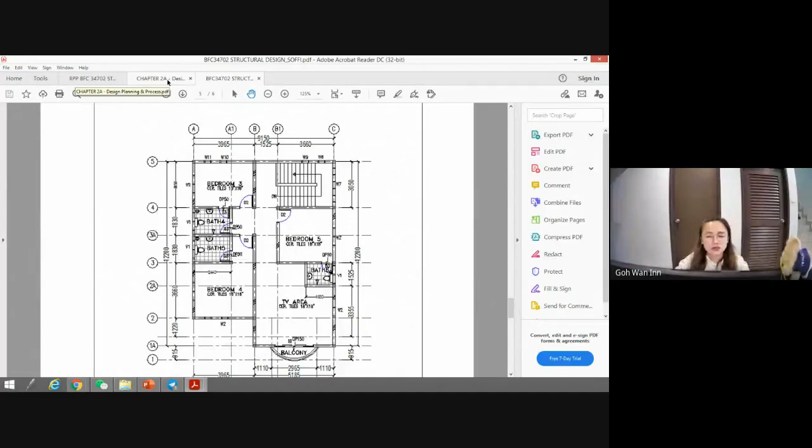So like this, you can combine chapters 1, 2, and 3, then you can answer question 1 in the final. Normally it's something like this. Another thing, they will give you theory again, but not every semester like this. Question 2, they will ask you to do the design of chapter 4.

Chapter 4, which is the beam design, rectangular beams, and then question 2 is for chapter 4, question 3 is for timber. Basically those are normally the questions. I don't want to go to other questions because now we are only at chapter 2. So let's get back to this, and I want to show you how you get that structural plan done.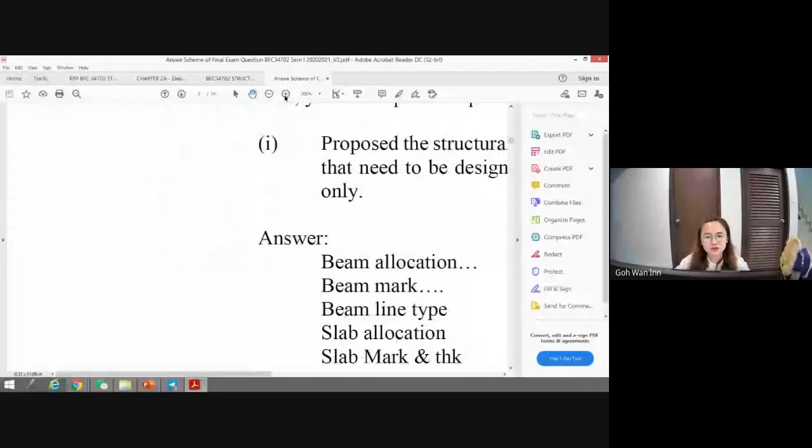Let me find the answer. So what is the content you need to have? This is the content you need to have. You better write it down, I will not give you this one, or you can do whatever you want. This is the marks that you will get checked from your architecture plans.

Okay, so let us take 5, and while I show you this, I open it like this so you can see. Zoom smaller.

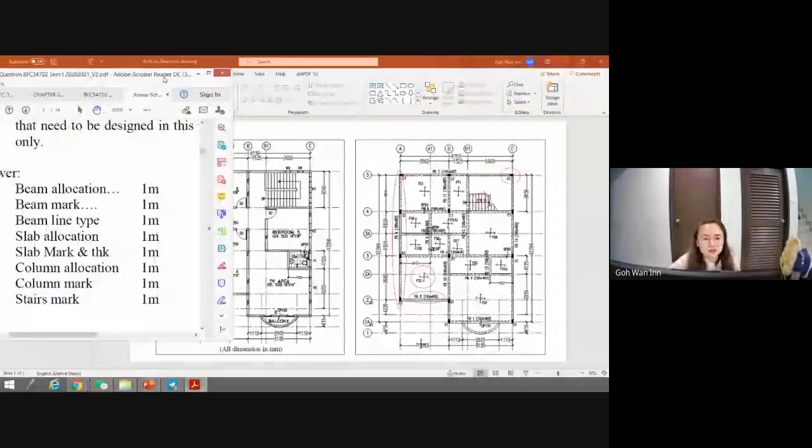Later, you write down this first. You write down what is needed first. And you look at this plan, this architecture drawing first. Can everyone see this? You can see this, right? Think first about how you're going to do it. Later I will explain to you. We take 5 minutes rest, is it okay?

Okay, I say okay. Okay, doctor. I want to have a toilet run, bye bye, 5 minutes. Don't go anywhere, you look at this. Bye bye.

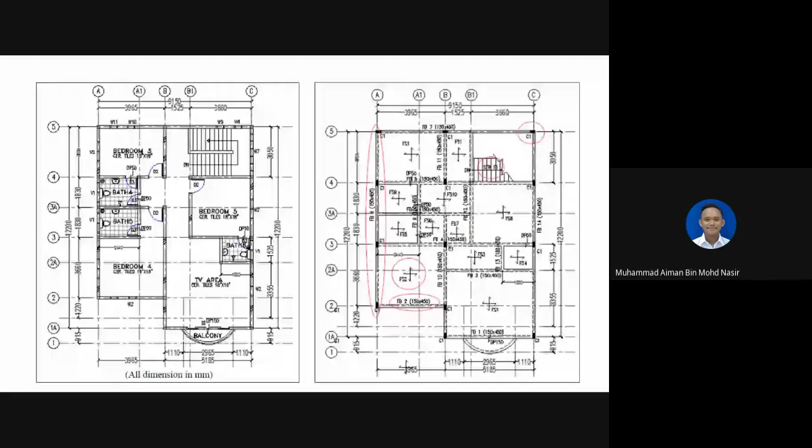Okay, wait, let me stand by it. I nak keluarkan color. Pen. I want to use a yellow pen. Okay, so you can see this is the. Semua dah ada? Ada yang hilang belum? Ada je. Ada, kita habiskan. Ada, cepat ada. Nanti you dah tak boleh absorb lagi kalau lepas 2 jam.

Okay, so ini architecture drawing. Okay, so this is architecture drawing. You nampak lah dia ada dimension. Normally kalau kita buat akan in millimeter. Okay, so you need to draw by hand and then you agak-agak lah you draw, no need to be really skillful. Tapi kalau you ada yang boleh tekap lagi senang, you tekap je atas je. So normally if you print out and then you do it, it's better lah. So, okay, ini A1, A1B, B1C.

So A1B, B1C, you have this lah. And then 1 to 5, you have 1 to 5. So you draw also need to have something like this. So easier for us to refer what is the beam and this and so on.

So firstly, you look at the beam. Okay, so this is a bed. You look at this one first. We explain this. So this is a first floor, bukan ground floor. That's why you tak ada ground floor punya tempat pintu masuk. Dia terus ke tangga naik. Okay, first floor plan, tangga, your staircase, you climbing up.

Okay, bedroom 3, 4, and 5. And then you have toilet area, bathroom 4. Okay, bathroom 4 for bedroom 3, bathroom 5 for bedroom 4, and the bathroom 6 for bedroom 5. And then this is TV area and balcony. Balcony, they have a curved slab. So what you have to do now is you need to plan the beam. You can see that, huh?

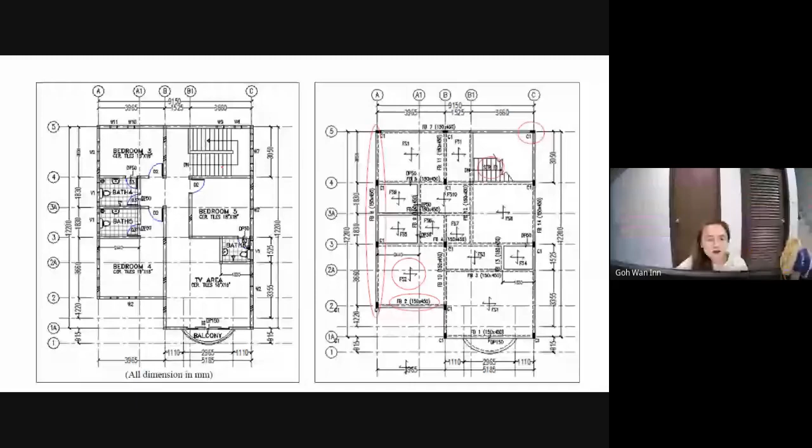So now, firstly, you look at this and plan the beam allocations first. Okay? So normally you see this, then from 5A to C. 5A to C, you can see this is one beam, okay? Okay, I go one by one here. 5A to C, you will see here, you have to have a beam. And then 4A to C, here you need to have one beam.

Even though here you can see that this is not drawn like a beam, actually it has one. Some of the students always make a mistake. Here they leave it blank, no beam. But actually you have to connect. We didn't see the beam from the architecture drawing because this is an architecture drawing, not a structural drawing, so it will not show you the beam underneath. It's already flush into the slab.

Imagine you go to the first floor. The beam is already flush, same level with the slab, right? You will not have the beam suddenly come up from the floor. It will make you fall. It is not nice. So the beam will be flush with the slab, and from the ground floor, when you look at the ceiling, if not covered, you can see the beams. Normally in school buildings, even in a terrace house, this is normal if the building is not covered by a ceiling.

Can you imagine that? Usually you see the slab with the beams above if there's no ceiling. Normally at the ground floor you can see the first floor with the beam, right? Can everyone imagine that? Can, right? Adi, Rama, are you with me? Usually if your house is not covered by the ceiling, you can see the beam.

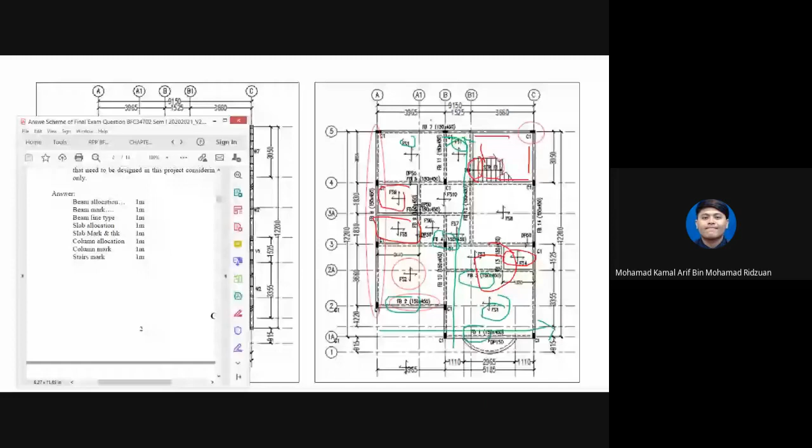You need to mark this. Your sketch is not necessarily exactly the same, but you need to put the A1, B, B1, C with the dimension. Yes, I know. This one is needed. Yeah, like dotted line, dash line, solid line, everything. Solid line and dash line is approximate, yeah. As long as you can differentiate what is solid line and dash line.

And this symbol for the slab, you need to mark the symbol, whether it is one way or two way. Okay. To calculate one way or two way is easy. Ly over Lx. Ly is the bigger one. So let's say for this slab, you can see that this is the longer one, right? 3965. So this is Ly. And this is 3050, right? So this is Lx. The longer one is Ly, the shorter one is Lx.

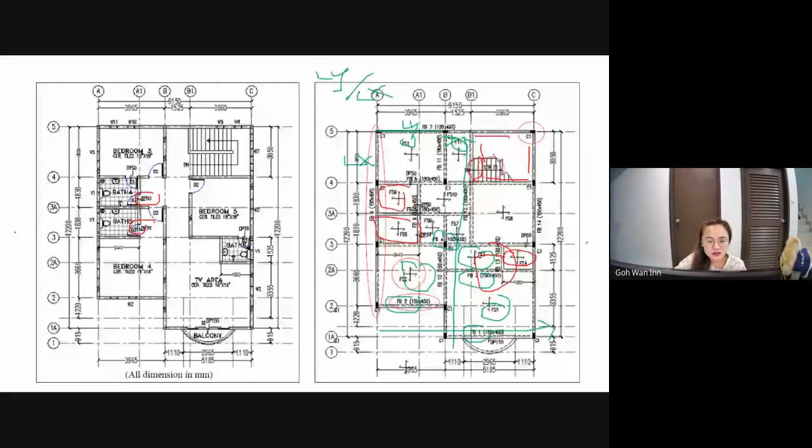So you divide. If less than 2, it is double. If greater than 2, it is single. So you can see an example, I think from this one. Okay, I cannot remember the value. Here is all two way. The other one is one way. It's marked as two way. Okay, when the ratio of Ly over Lx is more than 2, then it is single. You will learn more about it next.

Like if you have a drop, then you need to write it like drop 50. Here there is a drop, but the drawing is too small, you cannot see. Okay, then you can mention the drop 50 here. Okay, so let me clear it first. It's very messy now. Let me clear it.

Okay, so after you decide the slab, then we go for the column. Column allocation and column marks, also 1 mark, 1 mark. Staircase mark, 1 mark. Staircase is easy. You can see that you mark the staircase.

This is the staircase. You can draw like this also. Okay, you draw the staircase, like you put the dash line, the staircase, STR. Okay, and then the column. So for the column, you need to have the column mark and allocation. So the column mark here, let me go to this slideshow, wider look.

Okay, so at the architecture drawing, it will not show you this one. Why did I accidentally click the end slide? Wait. Let me show you my pen.

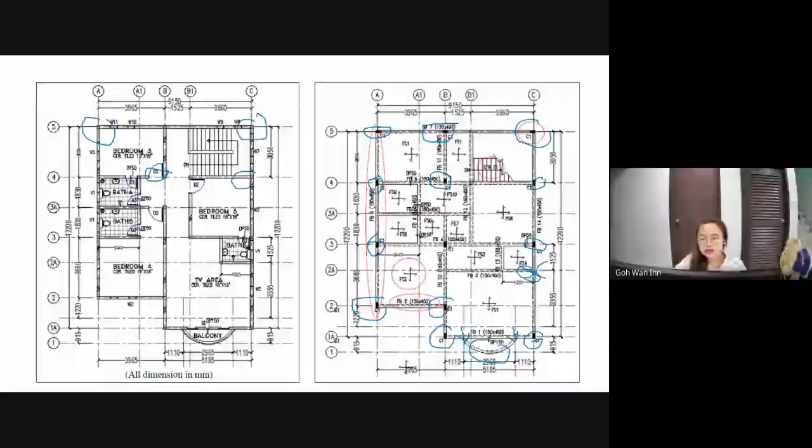But at the bathroom, as I said, the load is normally very small, and the beam size is very small. The beam size for the toilet is normally smaller than the main beam. So here no column, all here will become point load, point load, here is point load, all point load, because they are too close, no need.

Okay, so here also no column. Not nice, suddenly in your room there is a wall and then the column appears. Not nice, right? So here you can see that you also need to put a column because it's in the middle. It will distribute the load from around here and around here to these 3 columns. So that's it for all your columns for this floor.

So any questions on how to put all these? Basically, you need to put all these items. All these are compulsory things in your structural drawing. Let me show you once again. I will give you this one to refer to. So this is the mark you get. This is the answer scheme from the last final. So allocation 1 mark, beam mark 1 mark, line type 1 mark, allocation 1 mark, slab 1 mark, column allocation 1 mark.

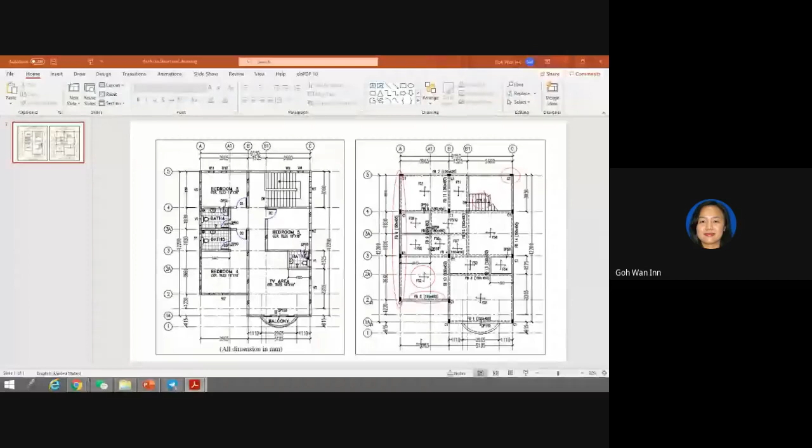Propose the ground floor structural layout plan for the house indicated by the structural elements. This is ground floor. You can ignore that one first.

I think it's just the stairs going to the five-foot way, what do you call it in the Malay language? Kaki lima. Small one. Okay. The small one. 1, 2, 3, no more. The answer is somewhere there. Okay.

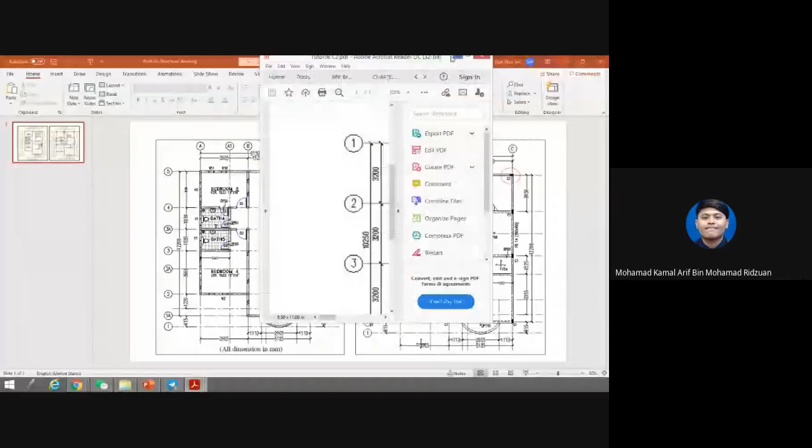You practice first. Don't worry. Whether you answer correctly or incorrectly, no marks. I will give you the answer later, but not now. Don't be angry. Outside is not needed. This is for you to practice tutorial one. I will not deduct your mark. This is for you to practice. You just need to design for this. Outside no need. You draw this one. You draw the beam for this one.

Kitchen, bathroom, bedroom, dining area, bedroom, living area, bathroom 1, master room. You draw this, the structural drawing. Okay. This is a question from last semester, test 1. Normally in test 1 you have to do something like this, and also the final, because this is the kickstart step to convert the architecture drawing to structural drawing. So you practice it first and then submit. Then next week I will show you the answer.

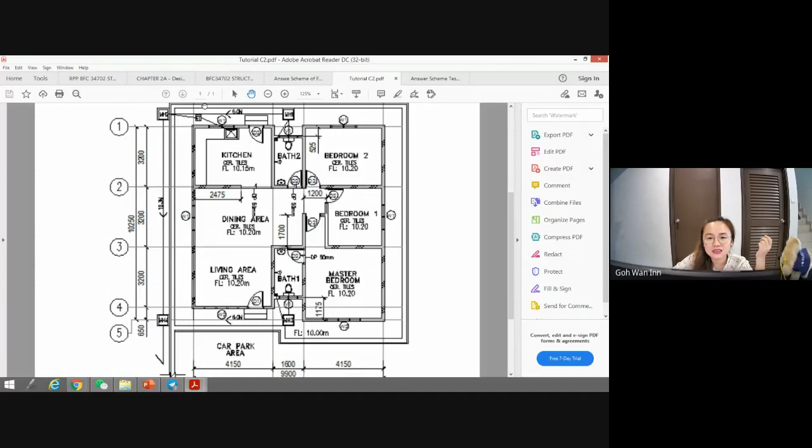Doctor, the outside one no need, right? Outside one no need, there's nothing there. This one no need, because it's not first floor. If first floor, then needed. Now no need. This is just its frame, the building. You just design here, this area.

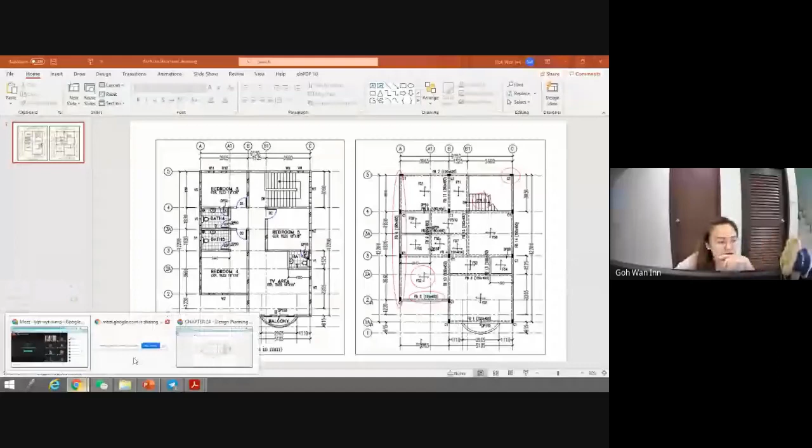So next week no class, but I already prepared a take home quiz. The take home quiz is also still chapter 2. You can see it, but I don't want to give it to you yet. You can see what I share now, right? I already set the take home quiz, but it will appear next week. You can print it out, answer, and then send it. So this is it again, but this one you need to consider this area. Outside you also need to draw. But not this week, next week.

You want it this week? No, not when you are fasting. Then you need to concentrate. Okay, not this week, next week. You do one first. Next week no class, but during that holiday I will upload it. So later no student complains to me about having class during the public holiday. Okay, you can do it.